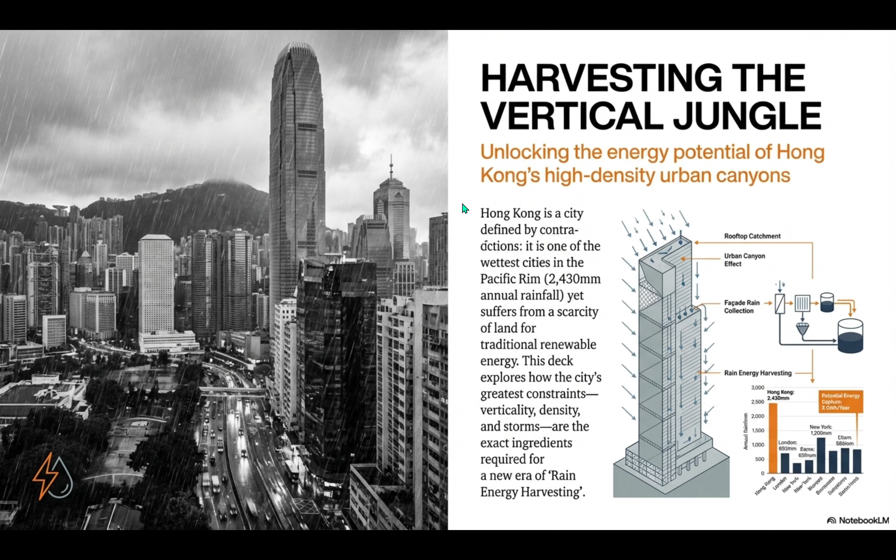You've got one of the wettest cities in the Pacific Rim. We're talking over 2,400 millimeters of rain a year. Which is just a staggering amount of water. Staggering. And at the same time, you have arguably the most vertical city on the planet. And yet, with all that wind, all that rain, all this amazing engineering, Hong Kong really struggles with renewable energy. It's a massive challenge. I mean, the city has basically zero ground space for solar farms. Land is just far too expensive, and it's way too dense for traditional wind farms.

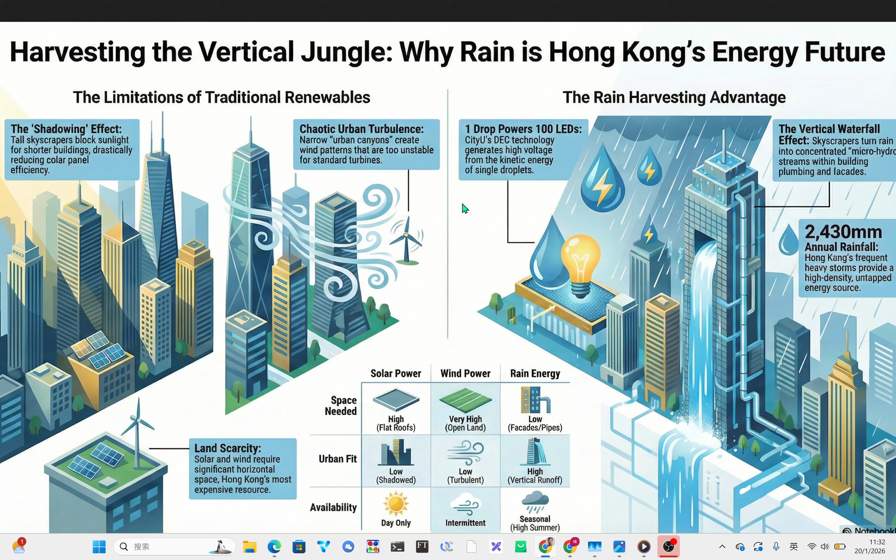But there's this new wave of research, a lot of it coming out of the City University of Hong Kong, that suggests the city's biggest constraints, the overcrowding, the shadows, the storms, might actually be its biggest energy assets. We're talking about rain energy harvesting. And I just want to set the expectation right now. We are not talking about putting little plastic water wheels in the gutter to power a flashlight. This is about turning the skyscrapers themselves into massive power plants. Specifically, a breakthrough technology called the droplet-based electricity generator, or DEG for short.

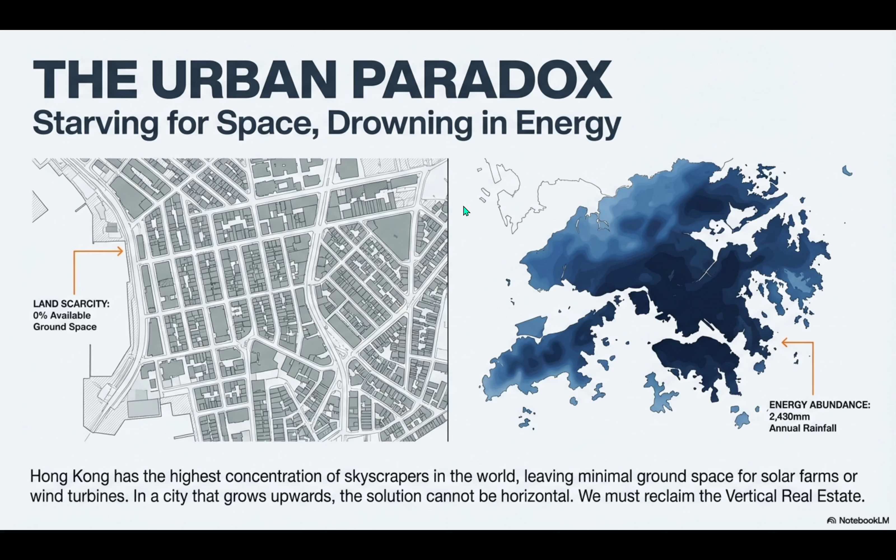The real aha moment for me, reading through all this, was so simple, it kind of broke my brain a little. We've been completely obsessed with putting solar panels on roofs. Rooftop solar, yeah. But in a place like Hong Kong, we've been ignoring the walls. And that's the vertical jungle theory. When you run out of horizontal space, which Hong Kong did decades ago, you have to start harvesting the vertical.

So let's unpack that. Before we get into the sci-fi tech of making power from raindrops, we need to understand why the usual suspects, solar and wind, have such a hard time in Hong Kong. Right. I mean, it's a subtropical city. It's hot. It's sunny a lot of the time. Why can't we just plaster solar panels everywhere? You would think so. If this were, say, Arizona, that would be the plan. But Hong Kong's geography is very specific and very aggressive. And it creates what urban planners call the urban canyon effect.

The urban canyon. It sounds like something from an action movie, but it's a real physics problem. Yeah. It's very real. When you have buildings that are 50, 60, even 80 stories tall, packed so tightly together, the sunlight just doesn't reach the bottom. Yeah, I walked through Mong Kok at noon, and it can feel like twilight because the shadows are just so deep. Exactly. And that really matters for solar. Panels need direct sunlight, direct hits to be efficient. If you're in shadow or you're just getting scattered light bouncing off other buildings, your efficiency just drops off a cliff. By how much? We're talking drops of 50, 60% or even more.

So you can't put them on the street, you can't put them on the walls because they're in shadow. So what about the roofs? The skyscrapers have roofs. Well, think about a Hong Kong skyscraper roof. In a sprawling city like LA, you have acres of flat warehouse roofs.

In Hong Kong, the roof is a tiny postage stamp compared to the height of the building. They're like needles. And I'm guessing it's not empty space up there. Not at all. It's prime real estate for all the mechanicals. You've got HVAC chillers, water tanks, elevator motors, window washing rigs, maybe a helipad, a sky garden. So the roof is already spoken for. It's finite and it's full, so solar is fighting a losing battle for space.

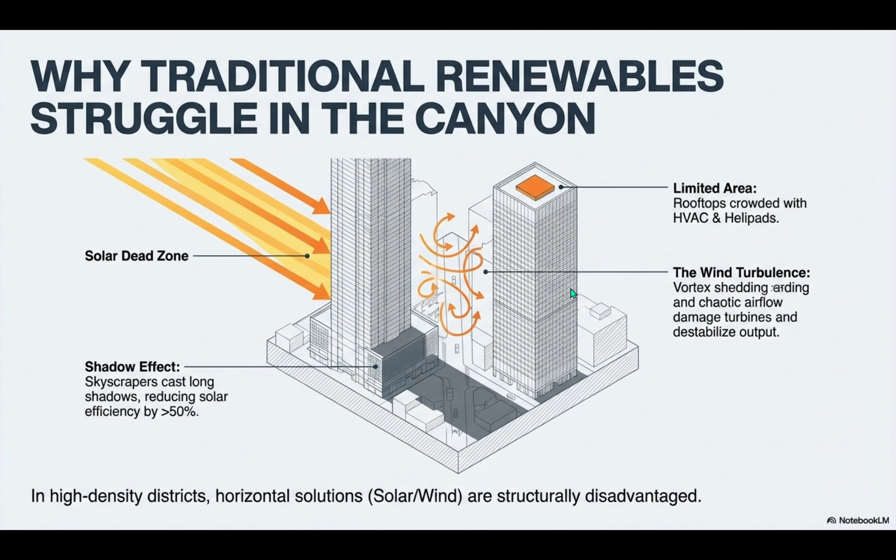Which brings us to what the research calls the suitability matrix. It's a way of looking at what the city actually allows you to do. Solar needs land or big roofs. Wind needs open space. But rain doesn't care about shadows. Rain is immune to shadows. Right. And more importantly, rain harvesting has a low space requirement because you can integrate it directly into the facades, the walls, which is the one thing Hong Kong has in absolute abundance. Okay, so that sets the stage. We need a power source that loves vertical surfaces and doesn't mind a storm.

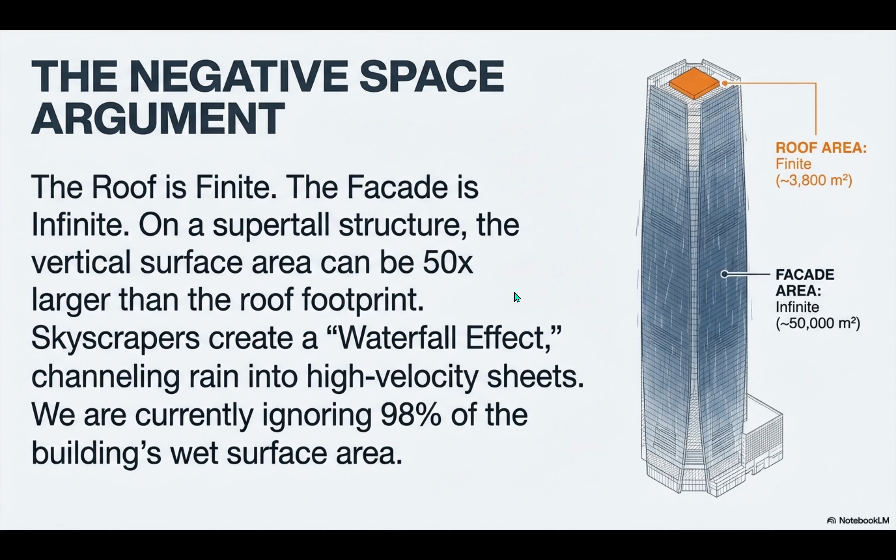Enter this droplet-based electricity generator from City U. This is really the star of the show. It's a genuine paradigm shift in how we think about hydro energy. I have to admit, when I first heard rain energy, I was picturing like a tiny hydroelectric dam on a windowsill. But this is molecular science. It is. The old tech was called triboelectric, which was basically just using friction. Like rubbing a balloon on your hair to make static electricity. Exactly that principle. And it was about as efficient as you'd imagine. It made tiny sparks. A novelty. The breakthrough here is a new structure based on a field effect transistor, or FET.

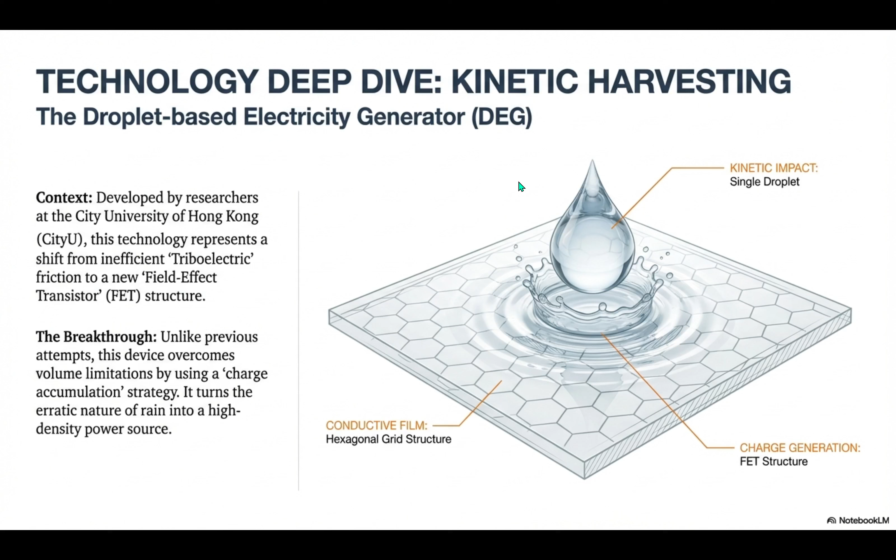Okay, let's slow this down. Let's really get into the nuts and bolts. How does a single drop of water hitting a piece of glass create any meaningful amount of electricity? It's a brilliant three-step process. So step one is the material. Imagine a glass surface coated in a very thin layer of PTFE. PTFE, that's Teflon, right? Like a nonstick pan. Yes, chemically very similar. And Teflon has this ability to store a quasi-permanent electric charge. So as rain hits it and flows over it, the surface itself builds up a high density of static charge. Think of it like charging a battery, but the battery is the surface. Okay, so the Teflon layer is just holding on to this charge like a loaded spring, waiting for a trigger.

Exactly. Step two is the bridge effect. This is the genius part. Embedded in the device are two electrodes, one made of aluminum, one of indium tin oxide, and normally they aren't connected, it's an open circuit. The switch is off. Correct. But when a raindrop hits that surface, it spreads out. And for a split second, that water physically touches both electrodes at the same time. The water becomes the wire. The water becomes the bridge. It closes the loop. Which leads to step three, the release.

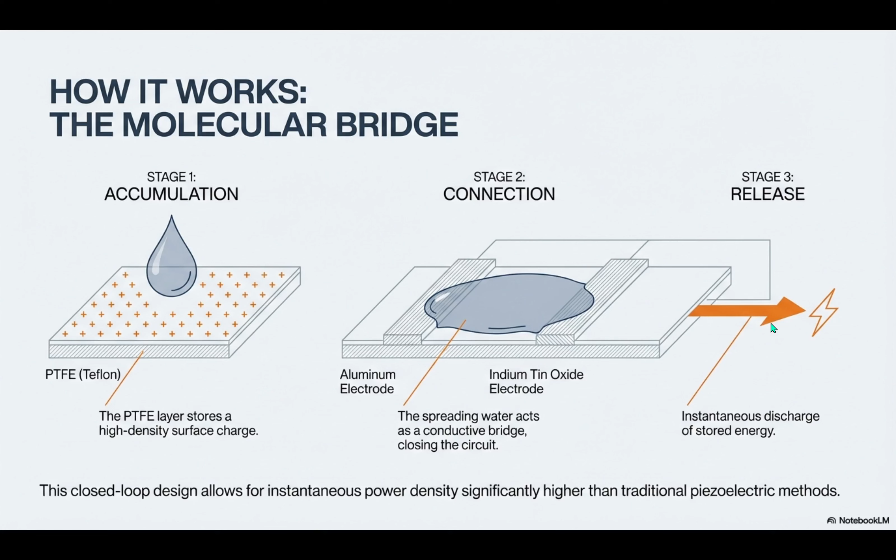Because the circuit is now complete, all that charge stored in the Teflon layer is released instantly in one massive pulse. I love that. The drop hits, spreads, and zap, it just dumps all the energy. It's not a trickle, it's a dump. And the numbers here are wild. The source says one single droplet, a tiny amount, 100 microliters, can generate 140 volts. It's astonishing. 140 volts is significant. It's enough to momentarily light up 100 small LED bulbs. That's the visualization that just stuck with me. One drop, 100 lights. It really changes how you see a storm, doesn't it?

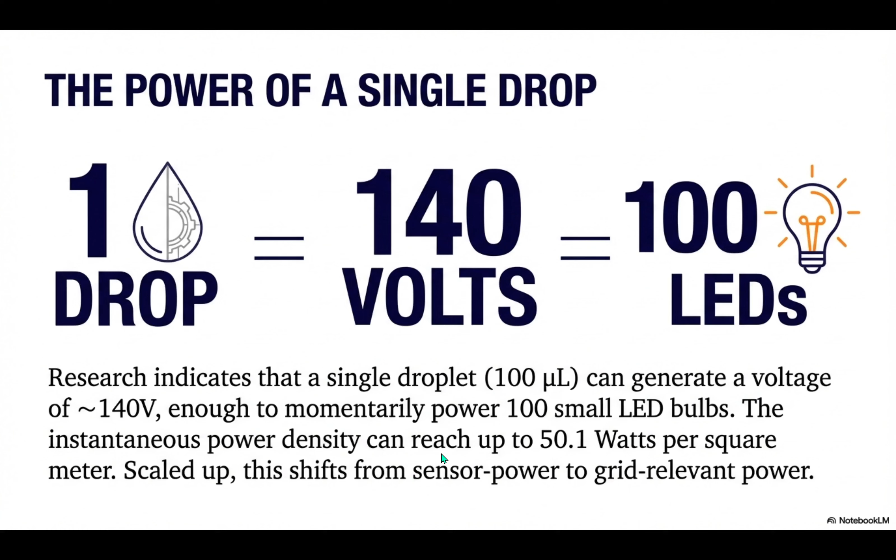Instead of just wet, you start seeing millions of these potential electrical pulses hitting the city every second. They achieved a peak power density of 50.1 watts per square meter. Which puts it in the same league as solar panels, doesn't it? In terms of peak output during a storm, absolutely. It's competitive. Which, of course, brings us to the big question, does this actually scale? Right. Lighting up LEDs in a lab is cool, but can it power a building? Can it run the elevators?

And that's where the ICC case study comes in. This is my favorite part of the research. I love a good theoretical showdown. So the International Commerce Centre, the ICC. For anyone who hasn't seen it, it's the tallest building in Hong Kong. Yeah. 484 meters tall. It's an absolute beast of a skyscraper. And the researchers basically ran a simulation. What if we covered the ICC in this rain harvesting skin? And this is where that geometry argument we talked about earlier really pays off.

The roof of the ICC, it's about 3,800 square meters. Sounds big, almost an acre. It is big. But then you look at the facade, the glass walls. That area is roughly 50,000 square meters. So the walls are more than 13 times larger than the roof. Effectively, it can be up to 50 times larger when you consider the usable surface area. You aren't losing space to HVAC units on the walls. It's massive. This is the negative space argument. If you only look at the roof, you're ignoring what? 98% of the building's wet surface.

So they ran the numbers. What happens during a storm? Well, this is the reveal. Let's take the roof first. If it's covered in solar panels during a heavy storm, your output is 0. It's dark and raining. Close to 0. But let's be generous. Let's say we look at its peak capacity on a perfect sunny day. That roof can generate about 0.76 megawatts. Okay, 0.76 megawatts for the roof.

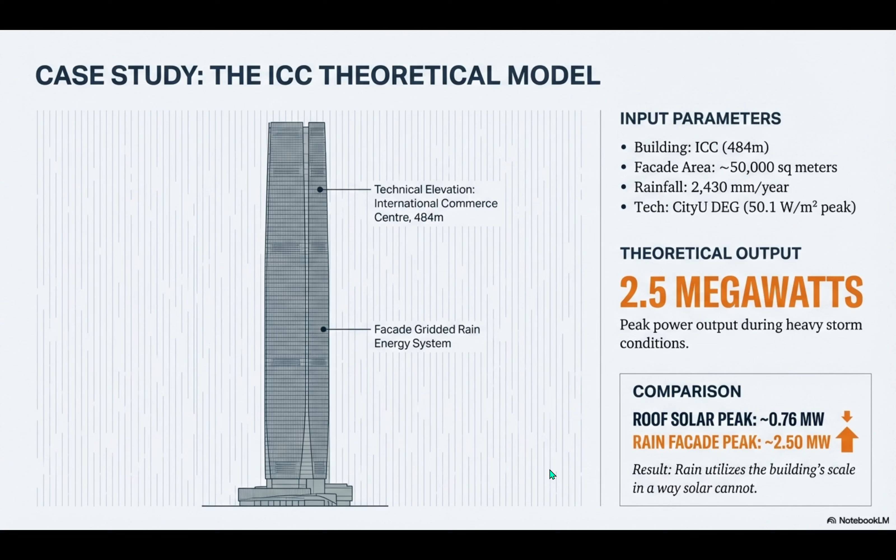There's a whole second layer to this research that I think is even more practical right now. You're talking about the virtual dam. Exactly. Think about what happens to the water after it hits the window. It doesn't just disappear. It runs down, it goes into gutters, and then into these huge vertical drainage pipes. And gravity takes over. Right. A 50-story building is, in essence, a hydroelectric dam. You have all this water at the top, and it's falling hundreds of meters to the bottom. That water inside the pipes has immense potential energy. So instead of just letting it crash into the sewer, you put turbines inside the pipes.

Microturbines. You can put small, inline turbines inside the building's plumbing. The research calls it turning a sunk cost, the drainage you have to build anyway, into a revenue stream. That just makes so much sense. You have to build the pipes to stop the building from flooding. You might as well stick a generator in there. And Hong Kong is uniquely positioned for this because it's already a sponge city. Right, the sponge city. I've heard that term. It means the city is designed to absorb and hold water, not just repel it.

Exactly. Because of its history with flooding, Hong Kong has some of the most advanced flood infrastructure in the world. There are these huge underground caverns for stormwater storage, like the one under the Happy Valley Racecourse. And the vision here is to integrate power generation into that existing flow of water. Yes. If you're already moving millions of liters of water into a holding tank, that is energy you are currently just wasting. The Hydrometropolis vision sees every pipe, every gutter as a potential power source. It really paints a picture of a city that lives with water instead of fighting it.

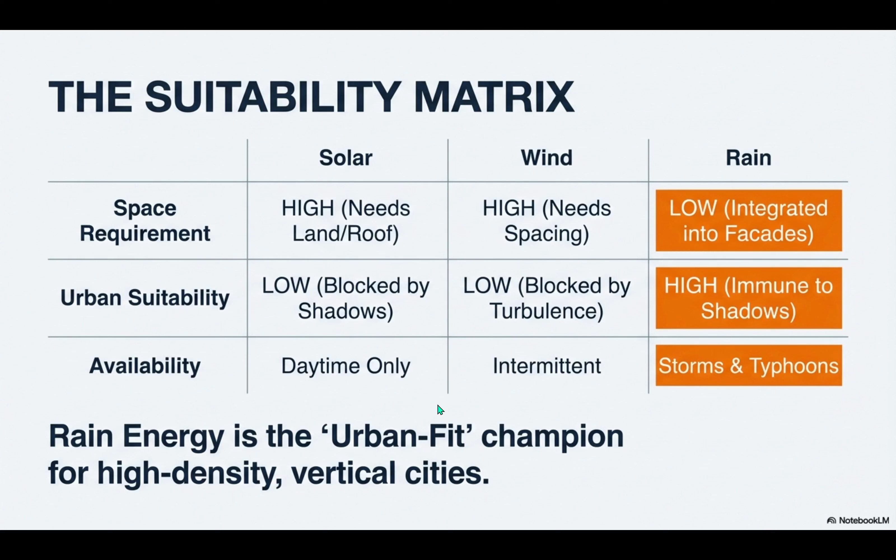Solar works pretty much every day, at least a little bit. Isn't rain energy just unreliable? That is the most common criticism. What about the dry days? And it's a valid point. You can't run a city on rain alone. But the researchers address this with a concept they call hybrid resilience.

Hybrid resilience. What does that mean here? It means you don't choose one or the other. You look at when they peak. So they plotted the energy output over a year. Solar is great in the winter when it's dry and clear. But in the summer, during typhoon season, solar production just plummets. Because of the clouds and the rain?

Right. There's this massive solar gap, and guess what fills that gap perfectly? Rain energy. It peaks exactly when solar fails. They are perfectly complementary. It's like a relay team. When the sun gets tired, the rain takes the baton. So it's not about replacing solar. It's about filling the holes in the grid during bad weather. Exactly. It's the stabilizer. It flattens the curve.

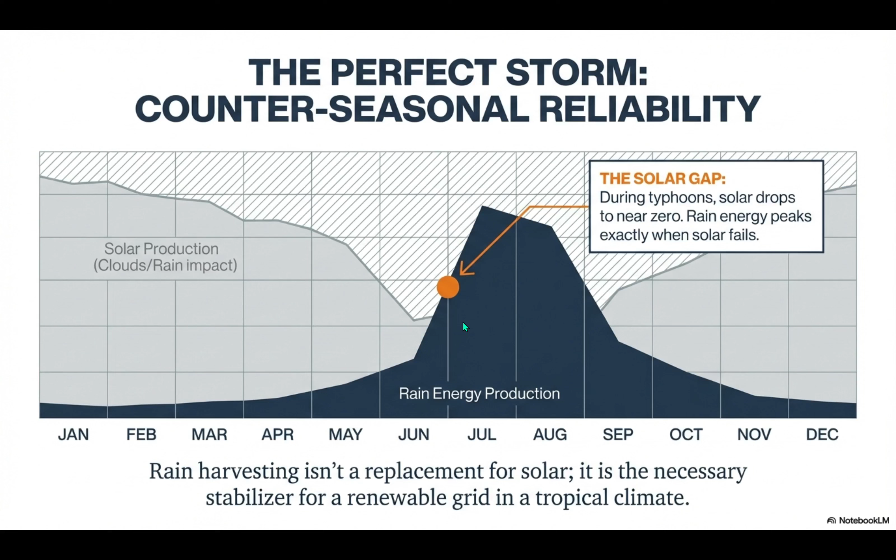I love that. So let's look forward. What does this future actually look like? If we fast forward, say, 20 years and this tech matures, what do I see on the street in Hong Kong? The sources describe this really cool vision of the Hydrometropolis. Imagine smart windows. The glass on the skyscrapers isn't just glass anymore. It's a transparent DEG film. And it's powering the sensors inside the office that control the lights or the AC. The building skin is powering the building brain.

Yes, a self-sustaining loop. And at street level, bus shelters, umbrellas. The research explicitly mentions coating umbrellas in this material. Wait, my umbrella? Your umbrella. Imagine you're walking in a downpour and the rain hitting your canopy is charging your phone in your pocket. That would actually make me look forward to a rainy commute.

And think about infrastructure. Bus stops lighting up their own schedules just from the rain falling on their roofs. It decentralizes power. You don't need to dig up a road to lay a cable for a sign if the sign powers itself from the weather. So we aren't there yet. What's holding it back? Why isn't the ICC covered in this stuff today? The roadmap in the source material highlights a few big hurdles. The main one is durability.

Let me guess. The salt. The salt. Hong Kong is a coastal city. The air is salty, it's humid, it eats metal. Creating a delicate nanogenerator that can survive a 100-mile-an-hour typhoon and 10 years of corrosive air. That's a huge materials science challenge. It's one thing to work in a lab, another to work on the side of a building in a hurricane.

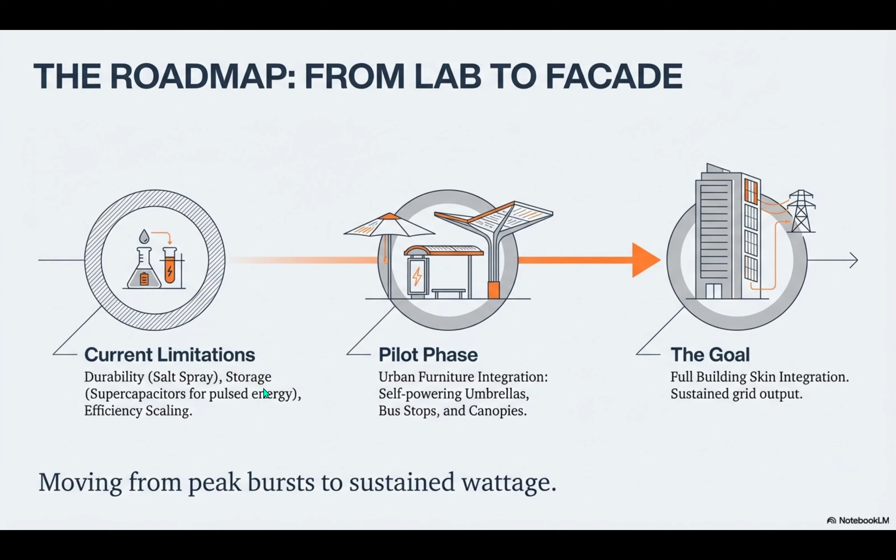Exactly. And then there's the storage issue. The energy comes in these quick pulses, zap, zap, zap. Our grid doesn't like that. It likes a steady flow. So you need to integrate supercapacitors to smooth those bursts into a steady current. So better batteries and tougher materials. But the physics works. The physics works beautifully. And the economics of using waste space on walls, it's incredibly compelling. The land cost is zero. The wall is already there.

It really just brings us right back to that intro image, standing in the storm. It does. We spend so much time talking about how cities need to be greener. And usually that just means planting some trees. But this feels different. This feels like the city itself is evolving. That's a great way to put it. In nature, nothing is wasted. A rainforest captures every single drop of water. This is just suggesting that our concrete jungle should do the same thing. It's about finally harnessing the verticality.

It is. We've built these mountains of glass and steel. We created these canyons. Now we're just finally realizing that the weather passing through them is a resource, not a nuisance. So here's my final thought for you listening. The next time you're stuck inside during a downpour, looking out at the gray sky, maybe you don't just see a gloomy day. Right. Look at the building across the street. Think about the millions of gallons of water cascading down its side. That is a massive untapped waterfall right in the middle of the city.

Wow. We just haven't plugged into it yet. And when we do, the skyline won't just be a place where people work. It will be the generator that keeps the lights on. I'll never look at a rainstorm the same way again.